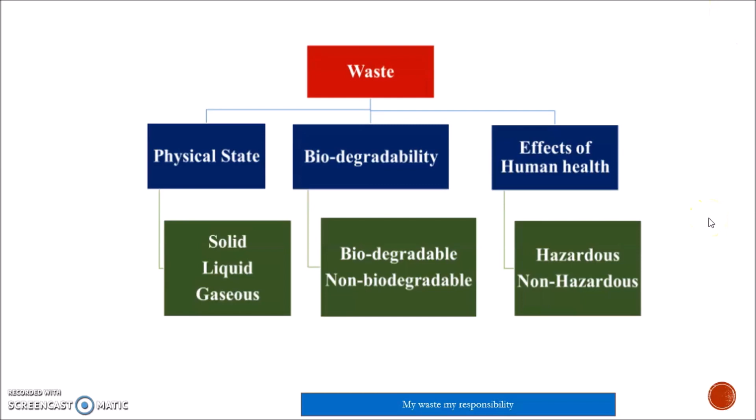So liquid waste management tools and techniques. Liquid management technologies are categorized based on sorting or segregation types, and a number of different methodologies are utilized: biological, physical, chemical, depending on the type.

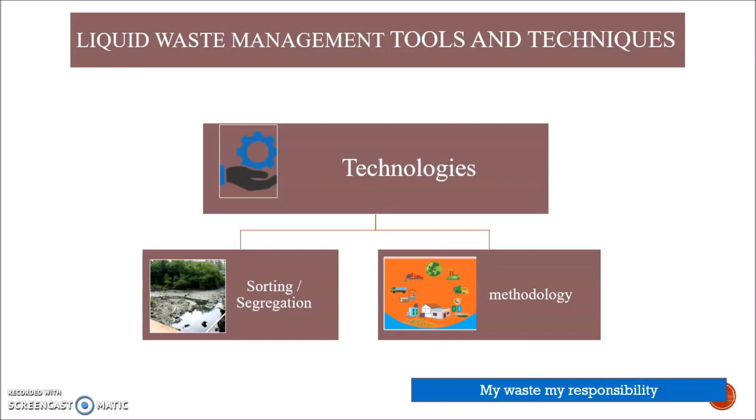Here also, the same decentralized system of liquid waste management, managing biodegradable waste, is implemented. Levels are of three types: household, institutional, and community. According to their level, the waste generation and quantity vary. Household level source of waste is limited, but institutional level it varies and is in bulk form. Community level is also the same.

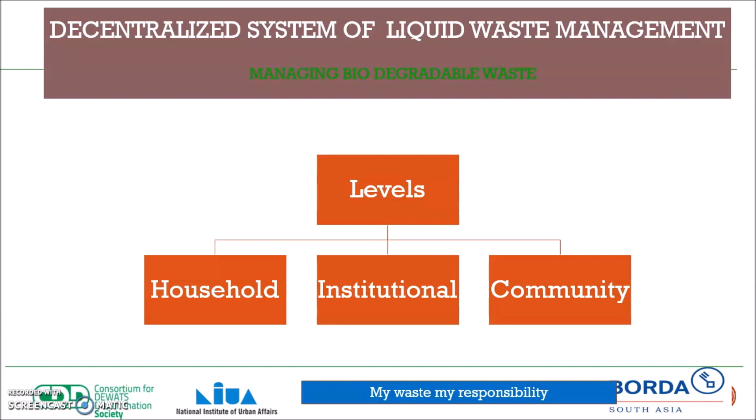So what is meant by sanitation? Anybody can define what is meant by sanitation? According to WHO 2015, the World Health Organization defines sanitation as generally referring to the provision of facilities and services for the safe disposal of human urine and feces.

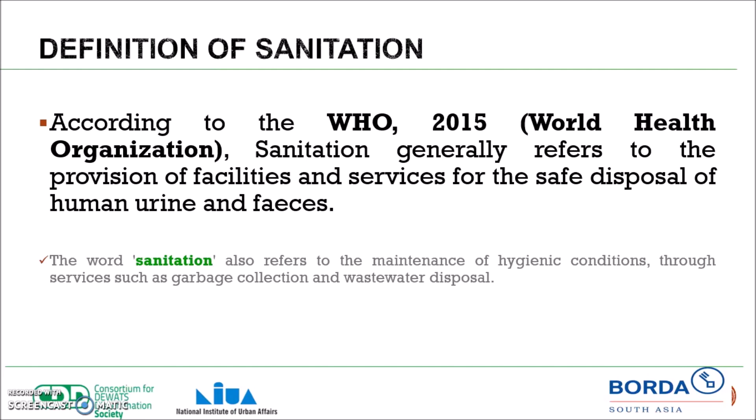According to the definition, the excreta of human beings, urine and feces, are to be properly segregated and sanitized or properly disposed of - this is nothing but sanitation. The word sanitation also refers to maintenance of hygienic conditions through services such as garbage collection and wastewater disposal.

This diagram shows the F diagram. It shows five figures, five faces - five Fs we are including here. The first F is feces, second F is liquid fluids, third F is fields, fourth F is flies, and fifth F is food. So this is the cycle you might be seeing here: fluid to food, food to field, field to feces, feces to flies, flies to new host, to fingers.

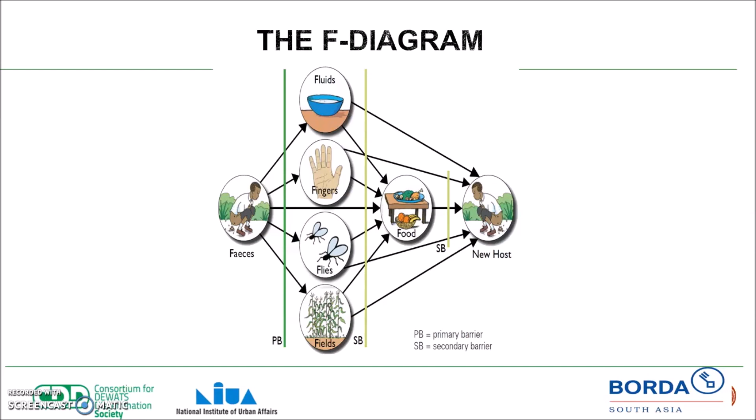So this is the primary and secondary chain - primary barrier and secondary barrier. This F diagram usually explains very well how we are affected by these things. So, sanitation and health.

Sanitation and health are closely and equally attached to each other. Similarly, 8 lakh 42,000 people in low and middle income countries die as a result of inadequate water or sanitation and hygiene each year, representing 58% of the total diarrheal deaths.

Poor sanitation is believed to be the main cause of 2,80,000 of these deaths. At least 10% of world population is thought to consume food irrigated by wastewater - the 10% population is feeding on agriculturally utilized wastewater byproducts.

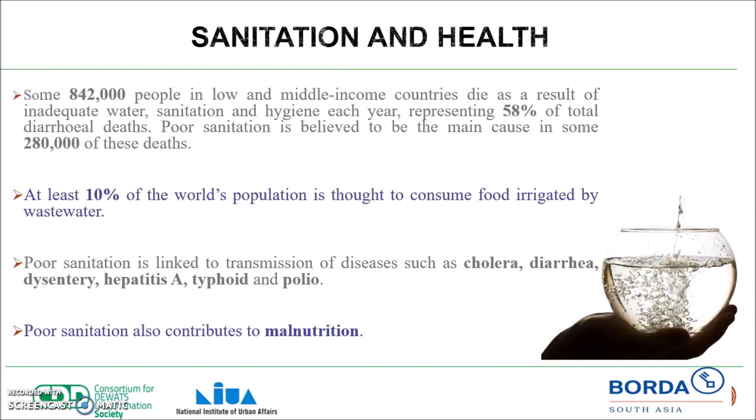Poor sanitation is linked to transmission of diseases such as cholera, diarrhea, dysentery, hepatitis A, typhoid, and polio. Poor sanitation also contributes to malnutrition. These are the sources of liquid waste: commercial, industrial, domestic, urban runoff, agriculture - these are the common ones.

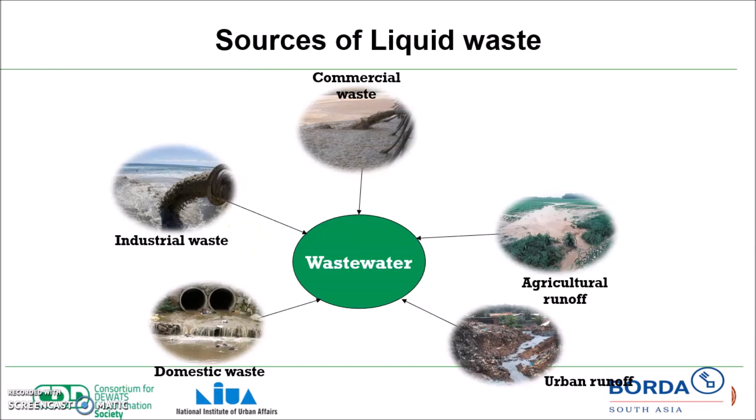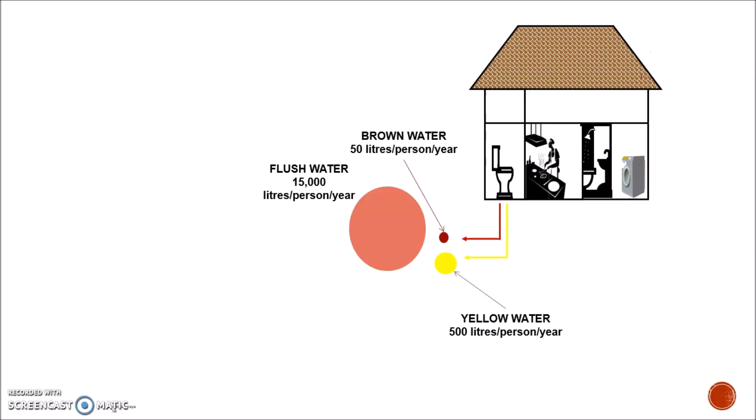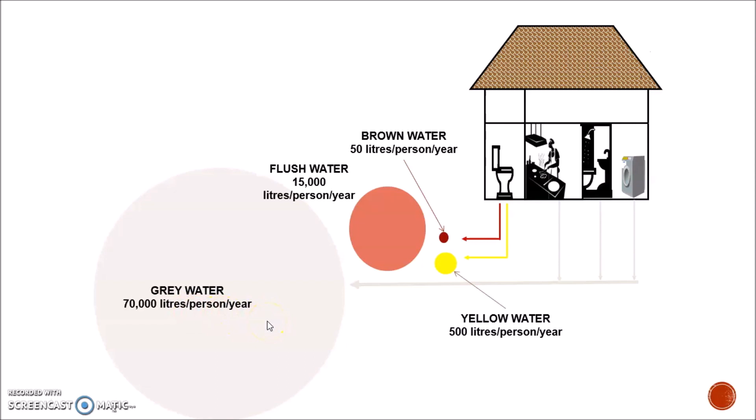So every person uses 70,000 liters per person per year. That is 70,000 liters.

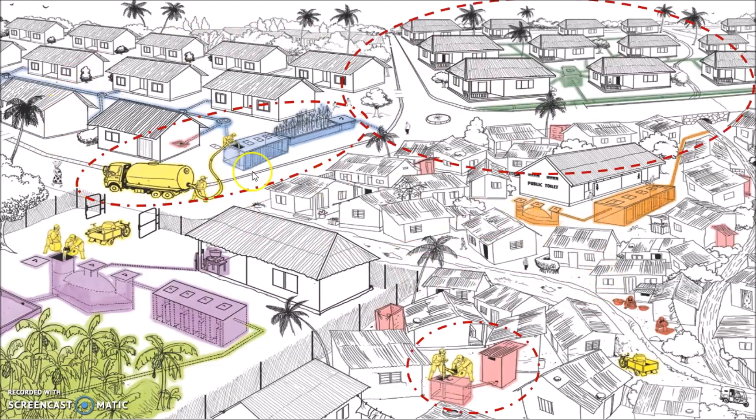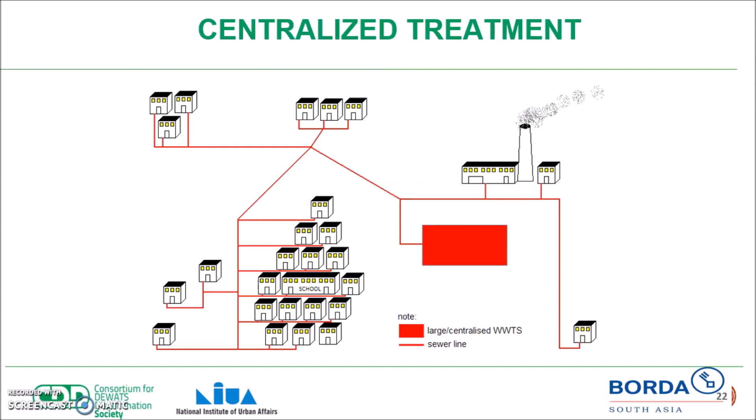So centralized treatment, as I earlier discussed - some of the industrial, some of the residential area, some of the small scale industries are collectively interlinked with each other. And decentralized wastewater treatment - they are treating each other and connecting the sewer lines.

So next is the black water treatment. What is black water or fecal sludge? It is the raw or partially digested semi-solid slurry that has been contained over a period of time. So the source is human excreta, or black water.

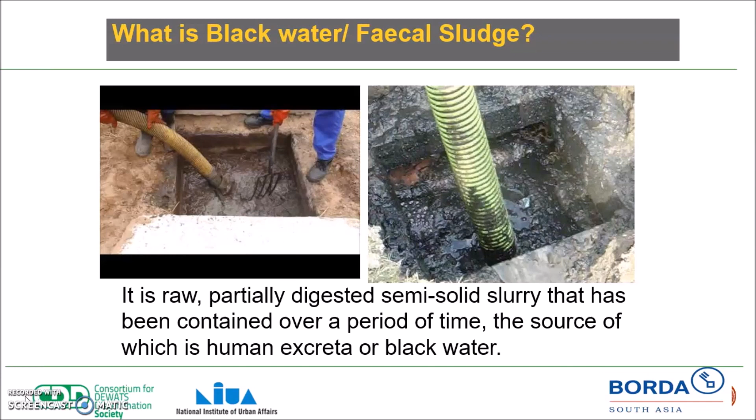So what is fecal sludge management? Fecal sludge management is a systems approach towards building sustainable and environment-friendly, safe infrastructure for all components across the sanitation value chain for non-networked households.

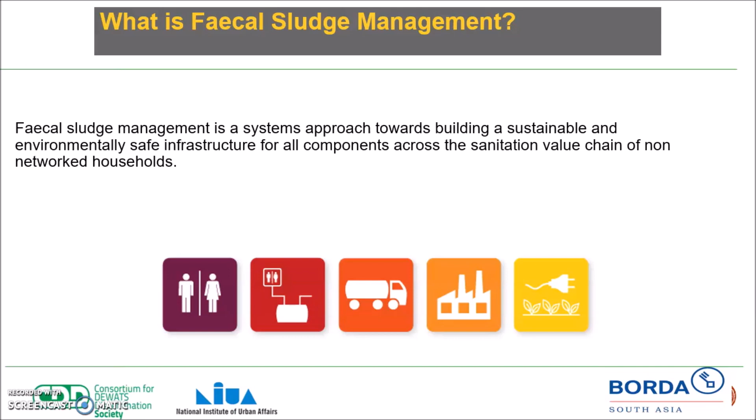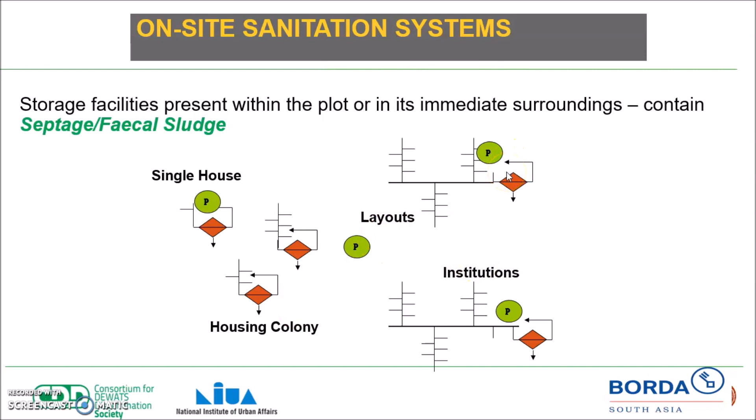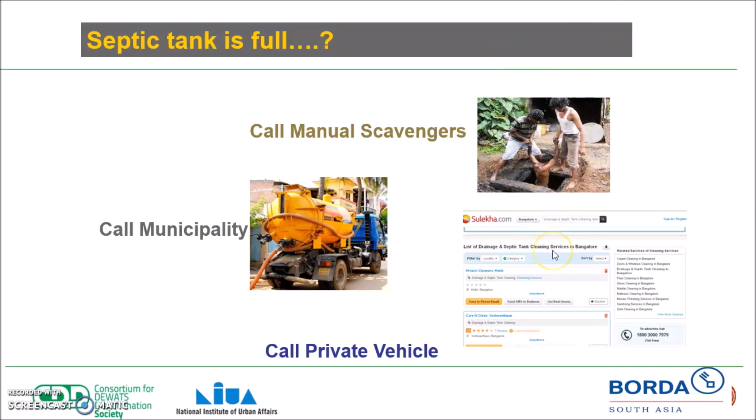So these are the storage facilities present within the plot or its immediate surroundings that contain septage or fecal sludge - a single house, a housing colony, layouts of institutional and private ones. So this is call manual scavengers, or a municipality, or a private vehicle, from any site, like the website Sulekha.com.

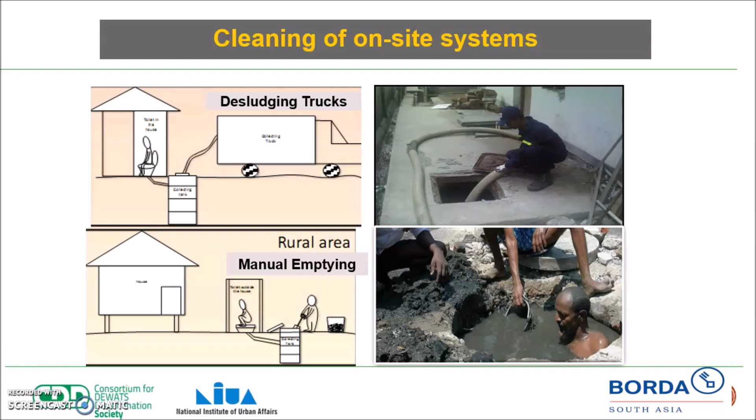Sureka - cleaning on-site systems. Desludging trucks, or manual emptying using human power. So that is fecal sludge disposal.

Next one - here is some of the septic tankers which generally collect the fecal sludge from septic tanks.

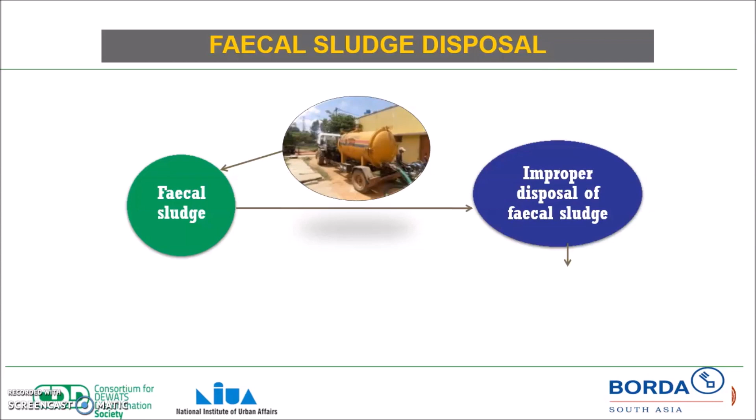Improper disposal of fecal sludge happens in this way, and there is disposal of sludge on agriculture farms for proper utilization purposes, or on agriculture beds or sand beds. So water bodies and vacant lands also end up utilizing this kind of sludge or slurry.

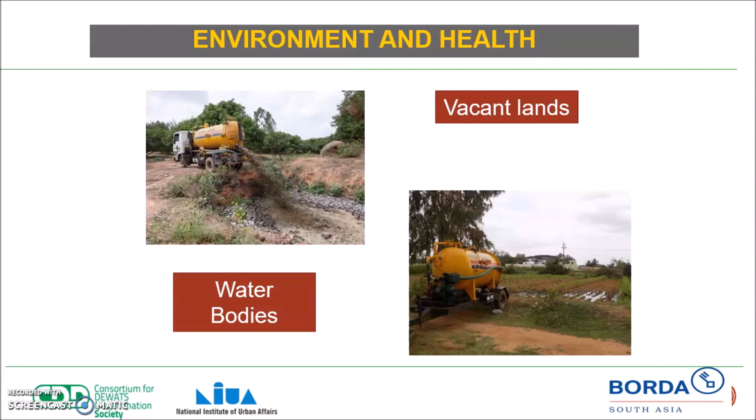Regarding environment and health, this kind of dumping of sludge in water bodies or agriculture farms may affect environmental sanitation or human health for the field workers involved. So it should be properly treated. After treatment, it could be disposed of in water bodies or on agriculture land, which would benefit both farmlands and workers.

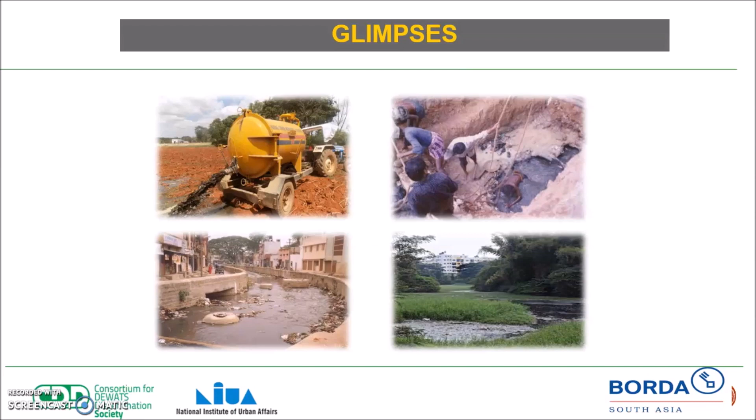Third picture showing open dumping channels or open canals, which are not properly managed, and it's showing plastic or sludge fully loaded in that. And lastly, one picture showing a pond ecosystem near the land or near the city, which is almost jammed or choked up due to sludge, human slurry, or grey water in it.

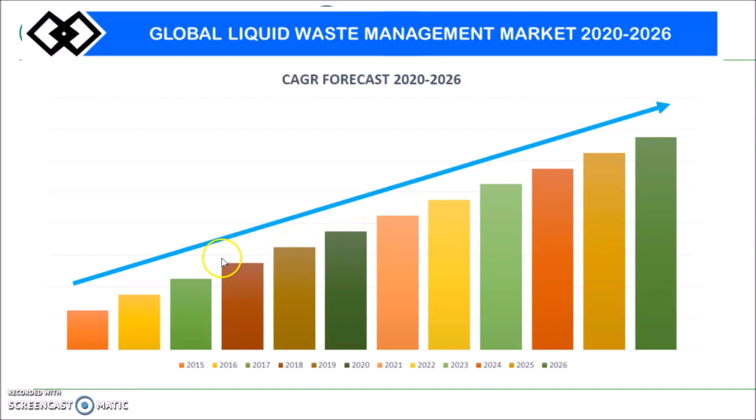So this is the global liquid waste management market from 2020 to 2026, showing a 5-year CAGR forecast model. It shows how the proportion of wastewater is increasing day by day, and shows its potential impact on the increasing load of water demand. So that's all for liquid waste management.